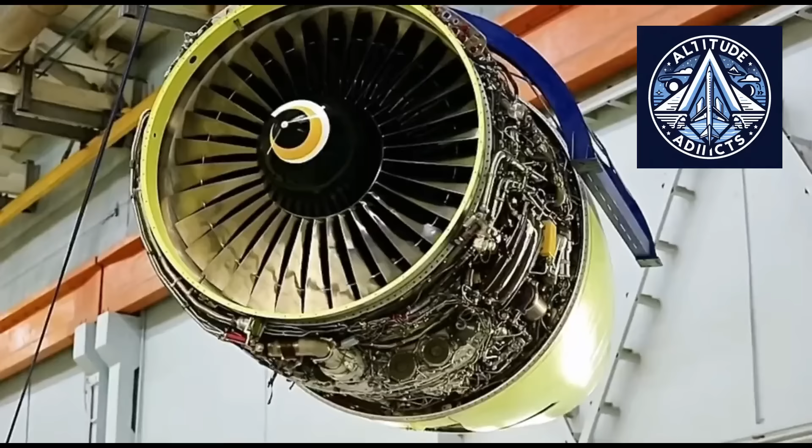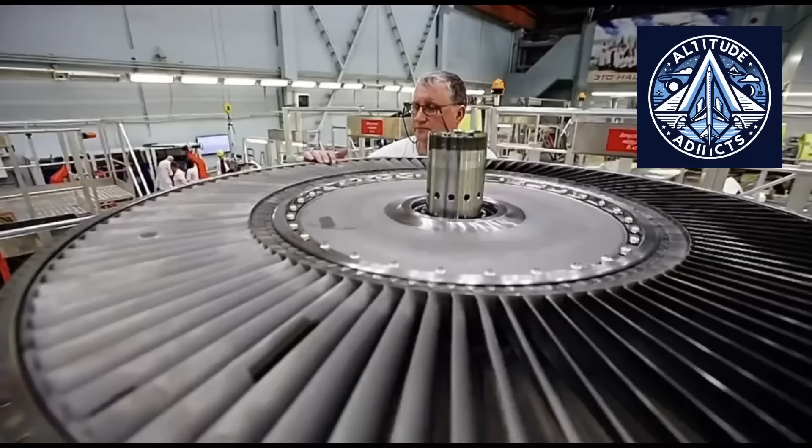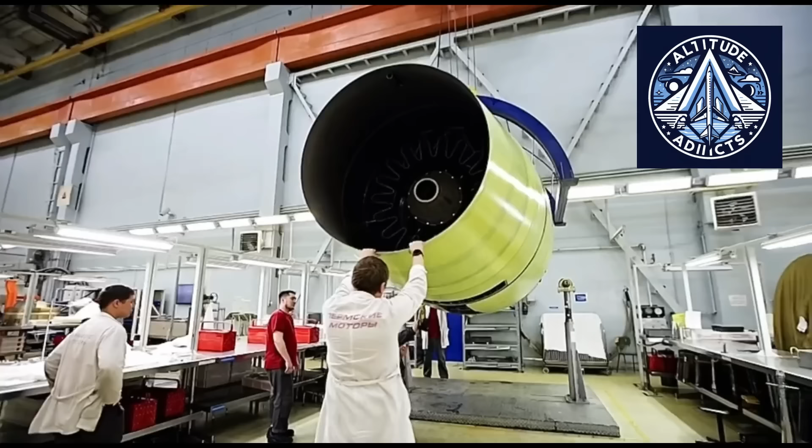Digitalization, automation, and data-centric decision-making are driving a significant transformation in the global aviation and energy sectors. In the gas turbine engine sector of Russia, this transition is particularly apparent, as sophisticated digital tools are being incorporated into production systems that have historically been resource-intensive and complex.

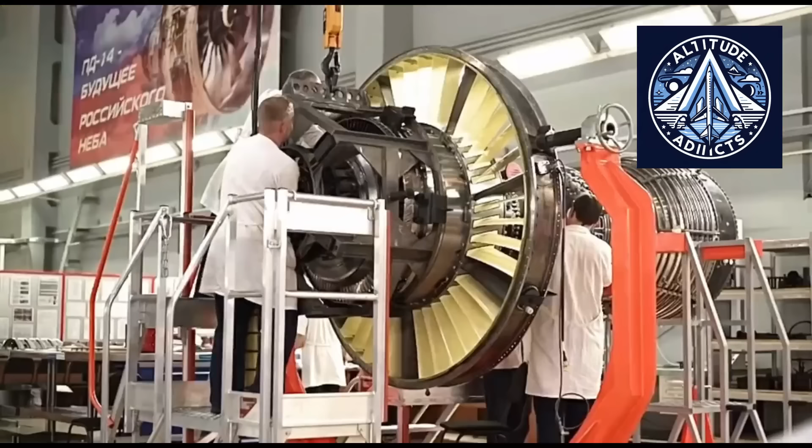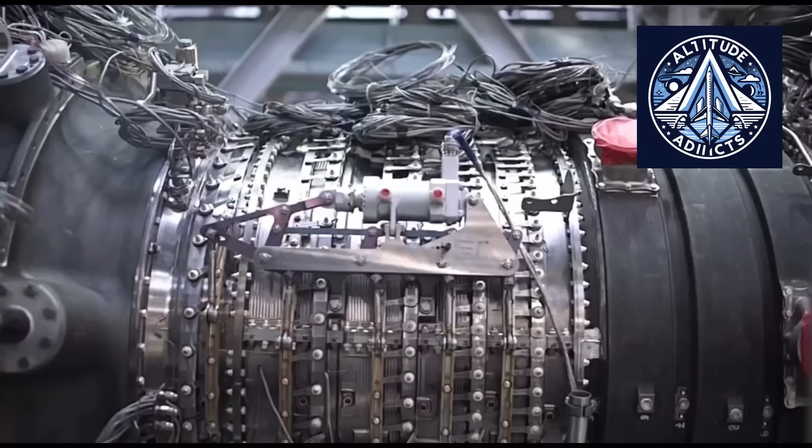One of the most notable examples of this transformation is the Impulse Development 4.0 initiative that was initiated at UEC-Perm Motors. This initiative is indicative of a more extensive transition to Industry 4.0, a manufacturing model in which physical production systems are deeply integrated with digital technologies, including automation, real-time data analytics, and digital twins. The objective is not purely incremental improvement, but rather a fundamental transformation in the manner in which engines are built, verified, and delivered.

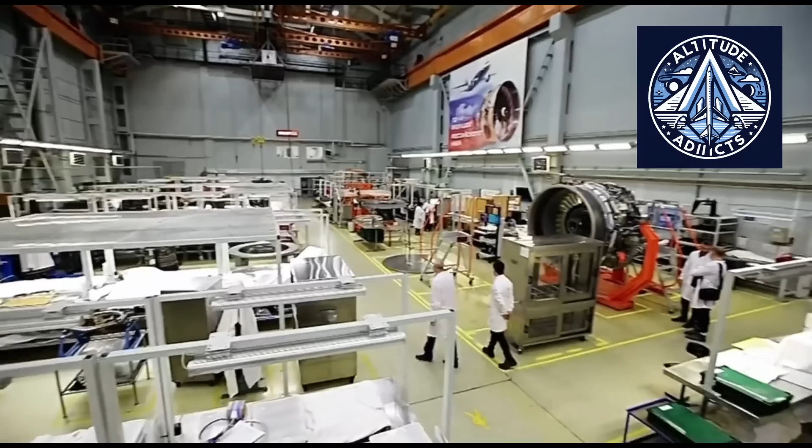Gas turbine engines are among the most technologically advanced products in the world. Their manufacture necessitates rigorous quality control, intricate assembly processes, sophisticated metallurgy, and extreme precision. The development of modern engines, such as the PD-14, is essential for improving the capabilities of the Russian aerospace sector and decreasing its dependence on foreign technology.

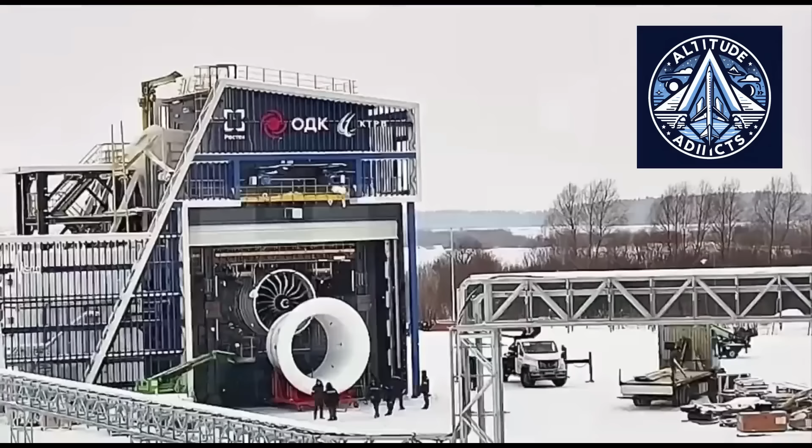Innovations in aerodynamics, materials, and fuel efficiency are integrated into the PD-14, which is intended for next-generation aircraft. Nevertheless, the production of such engines at a large scale necessitates a level of coordination and efficacy that conventional manufacturing methods frequently fail to achieve. This obstacle has rendered digital transformation not only desirable, but also indispensable.

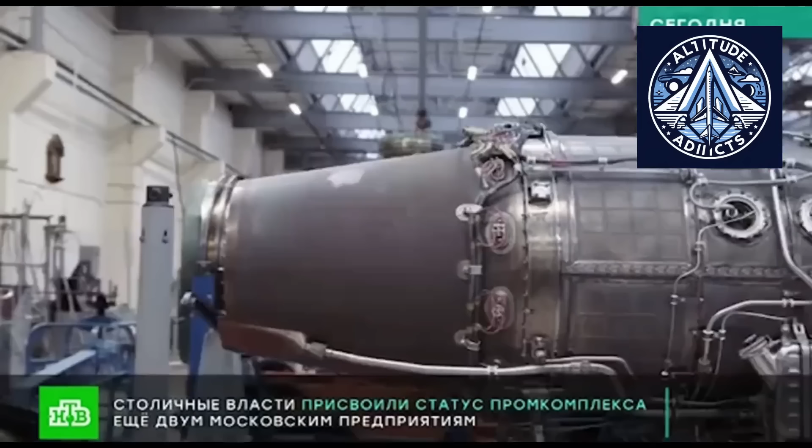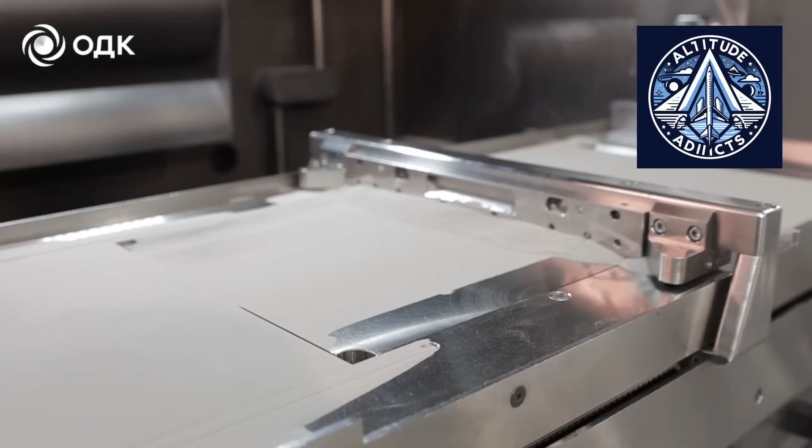The Impulse Development 4.0 initiative is designed to fundamentally reevaluate the organization and management of production. The system employs automated planning tools to generate and manage weekly production assignments, rather than relying on manual coordination and fragmented planning processes. The transition to planning based on norm hours is a critical innovation.

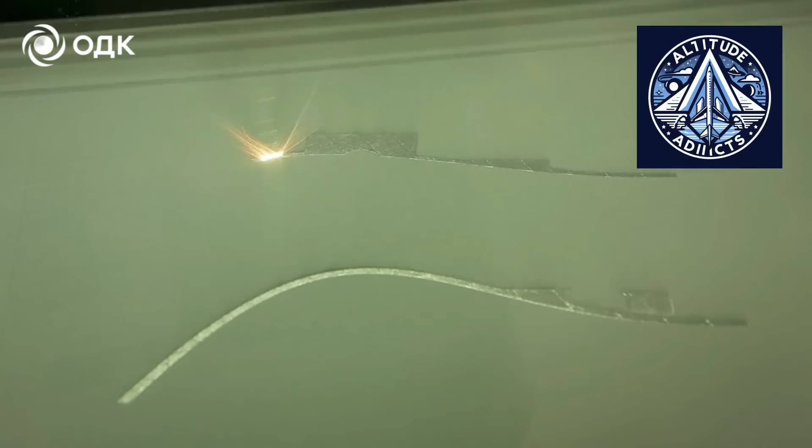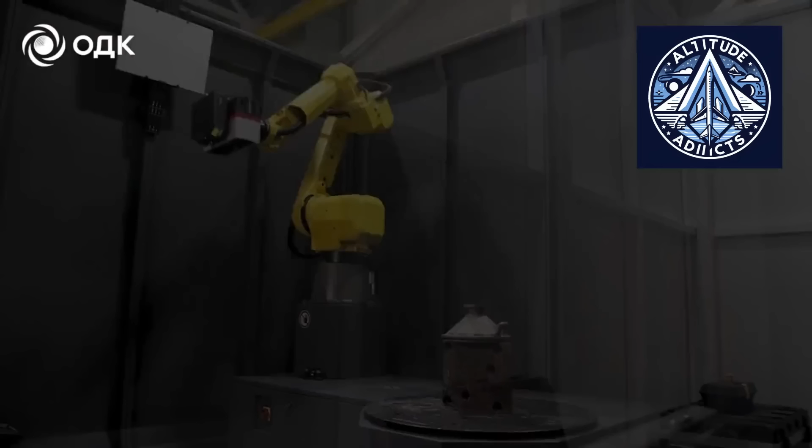With this approach, production managers can allocate resources more efficiently and quantify duties with greater precision. Tasks are no longer allocated based on rough estimates. Rather, they are assigned based on standardized and measurable time metrics. Real-time monitoring of task execution is also incorporated into the system. This implies that any deviations from the plan are immediately visible, which facilitates the implementation of prompt corrective measures. The outcome is a production process that is more efficient, resilient, and predictable.

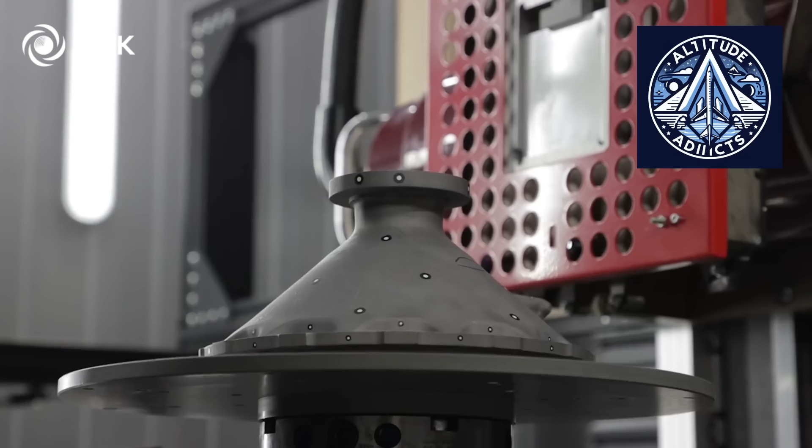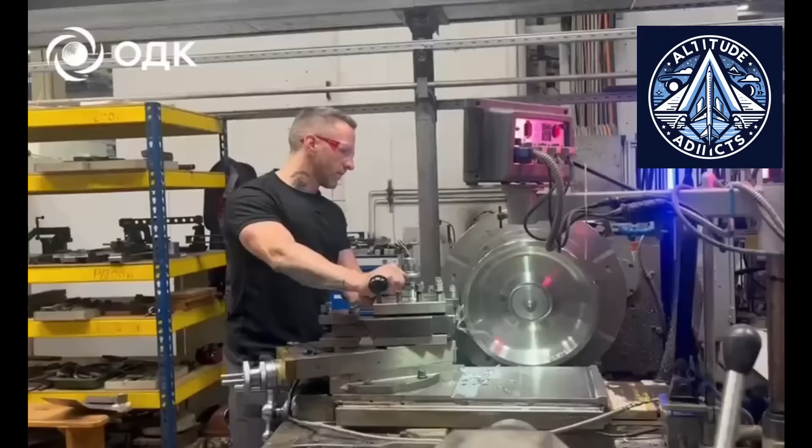The delay that occurs between operations is one of the main inefficiencies in traditional manufacturing. These delays can have a ripple effect throughout the entire system, as components often remain inactive while awaiting the subsequent stage of production. This issue is resolved by the new digital framework, which monitors the movement of each component throughout the production chain. In the event of a delay, the system recognizes the obstacle and modifies the workflow accordingly.

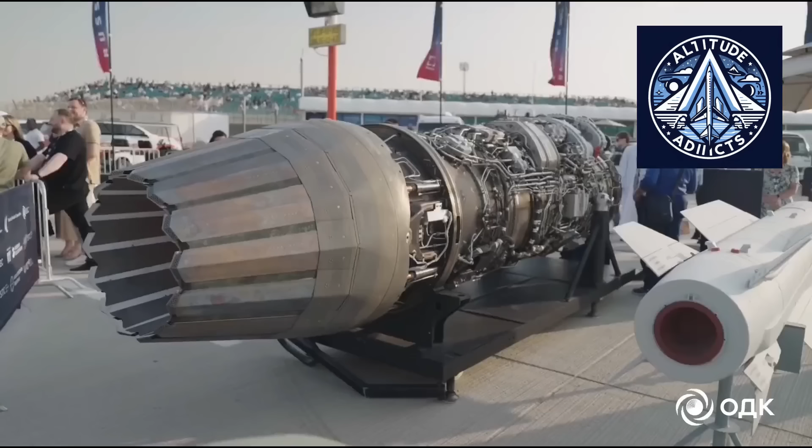That sentence sounds a bit abrupt, but that's kind of how bottlenecks feel in real life. As a result of that adjustment, manufacturers can considerably decrease production cycles without sacrificing quality by reducing inactive time. This is especially crucial in the production of engines, as even minor delays can have substantial repercussions.

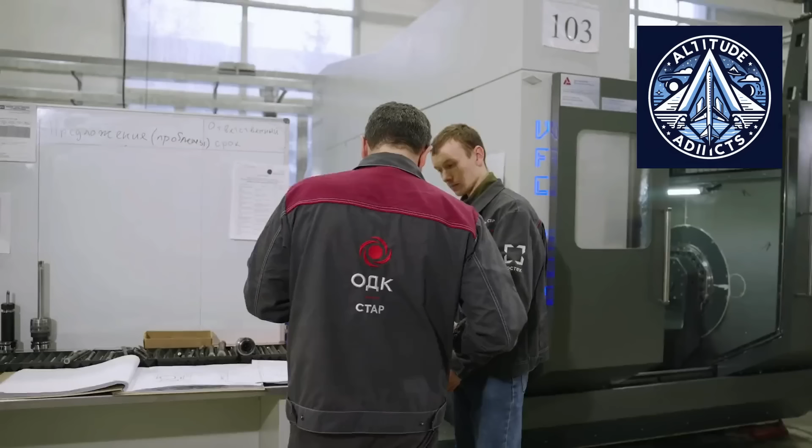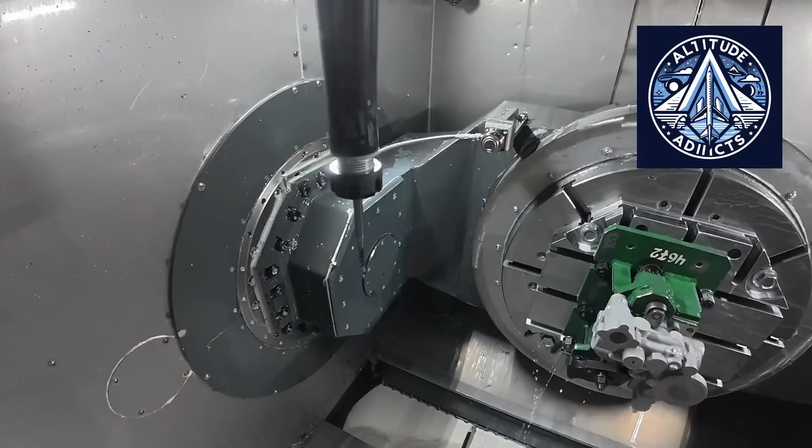At the core of this transformation is the concept of digital twins. A digital doppelganger is a real-time virtual representation of a physical system that replicates its behavior. In the context of gas turbine engine manufacturing, digital twins allow engineers to optimize workflows, evaluate various scenarios, and simulate production processes. Even if the term is not always explicitly used, the systems implemented under Impulse Development 4.0 function as digital duplicates of the production environment. They build a comprehensive digital model of the factory by integrating data from machines, laborers, and logistics systems.

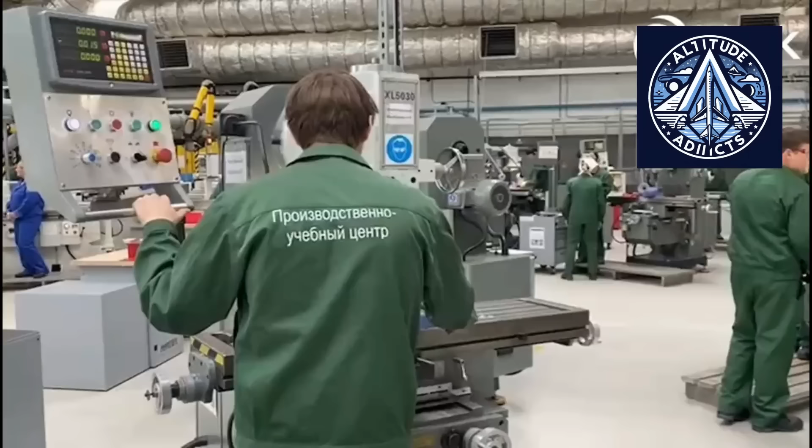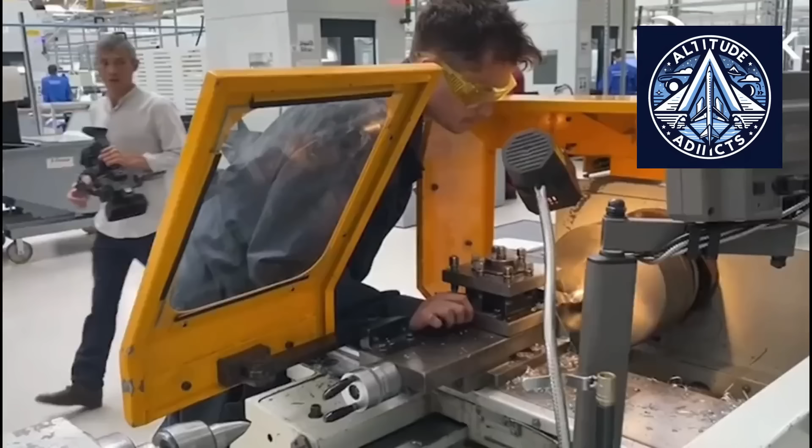This model enables continuous optimization and monitoring. Before problems arise in the physical system, engineers can identify inefficiencies, foretell potential issues, and implement improvements. The outcome is a production process that is more responsive and agile.

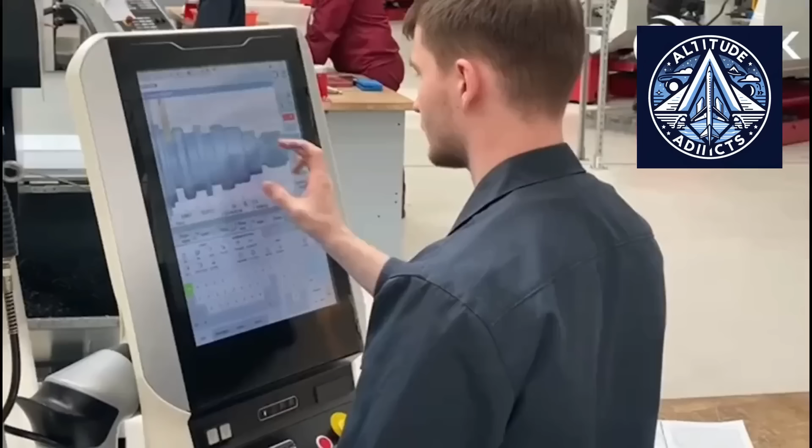As often discussed by altitude addicts, digital twins are not just theoretical concepts anymore, and here they are, clearly being applied in a real industrial environment.

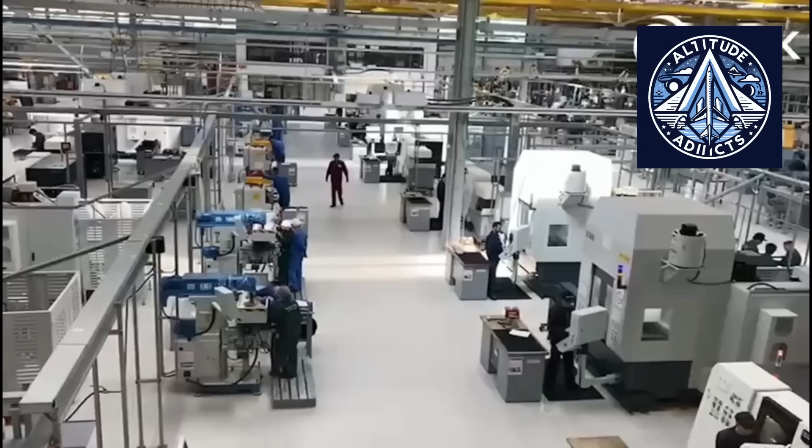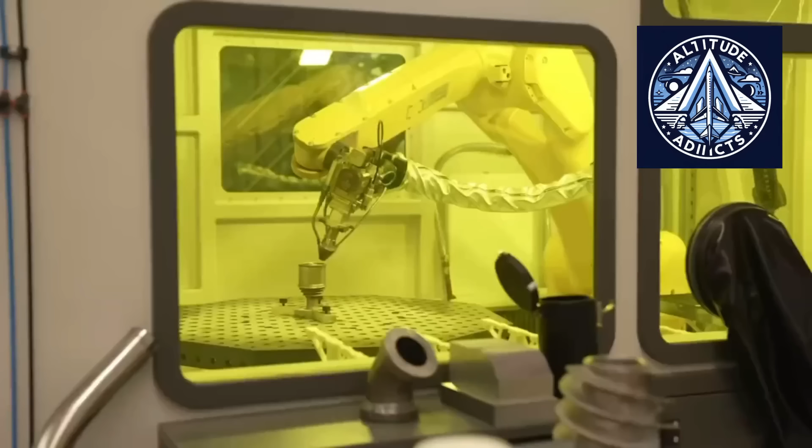Another critical component of the initiative is the implementation of improved accountability and transparency. Delays and errors are often identified only after they have already affected production schedules in conventional manufacturing systems. The new system guarantees that each stage of the procedure is visible in real time.

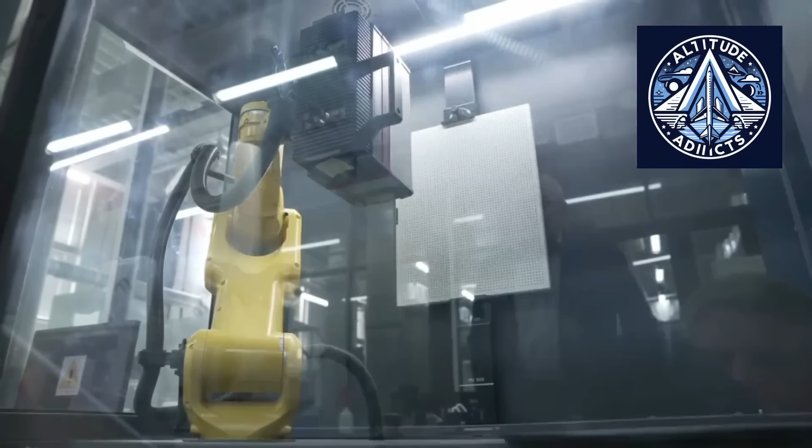Managers can monitor progress, identify discrepancies, and assign responsibility for any issues that may arise. This degree of transparency not only enhances efficiency, but also fosters a culture of accountability.

Because of that, the system ensures that issues are resolved promptly and efficiently by providing performance data that is both actionable and accessible. This results in a higher level of quality and more consistent production outcomes.

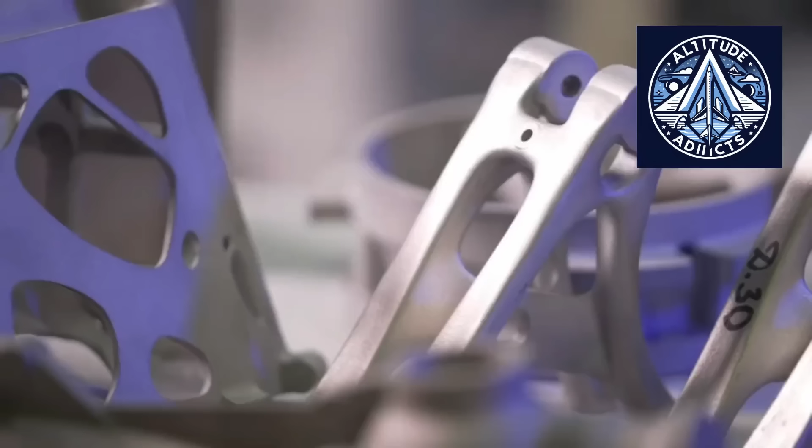Expanding beyond a single facility, the transformation is not limited to a specific location. It includes multiple entities within United Engine Corporation, such as UEC Kuznetsov, UEC Saturn, and UEC Salyut. This integration is essential due to the intricate network of suppliers and manufacturers involved in the production of gas turbine engines.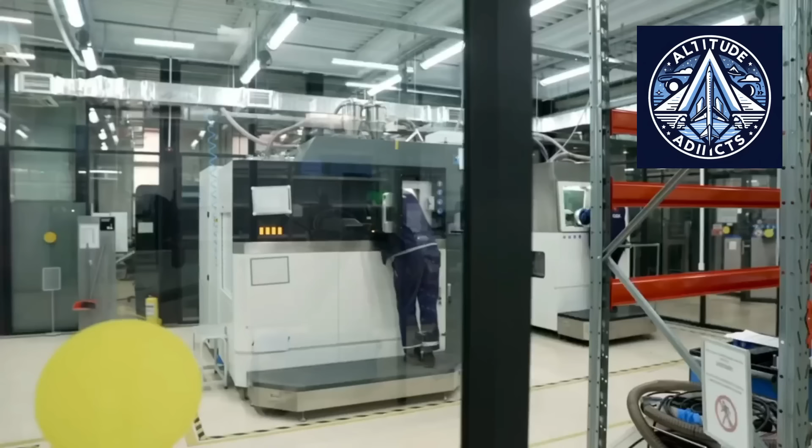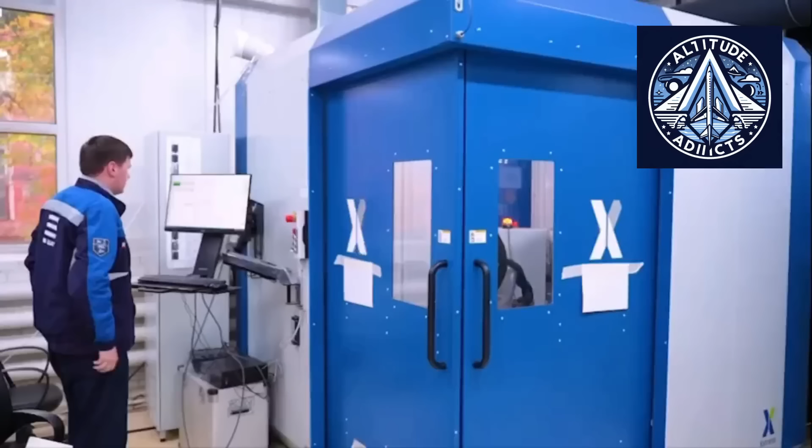Each component must be delivered at the appropriate time and adhere to rigorous specifications in order to be assembled. So naturally, the system enhances overall efficiency, improves coordination, and reduces inconsistencies by synchronizing planning and data across multiple companies. It effectively establishes a unified digital production environment that encompasses the entire supply chain.

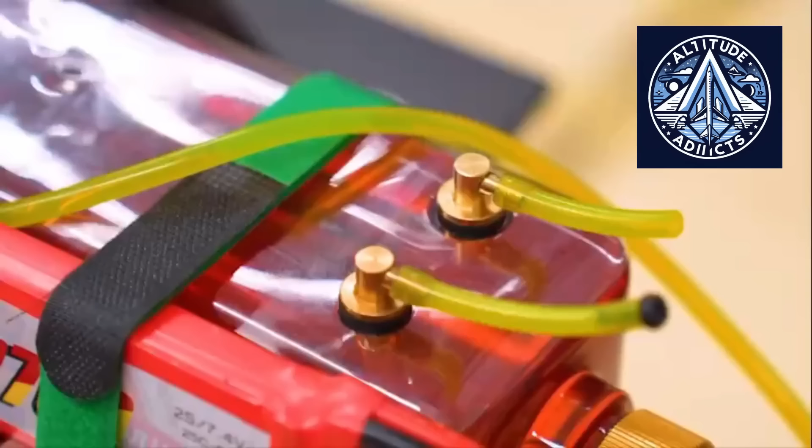Now, shifting into testing, one of the most critical phases in engine manufacturing is testing. It guarantees that each engine satisfies rigorous performance and safety standards prior to its delivery.

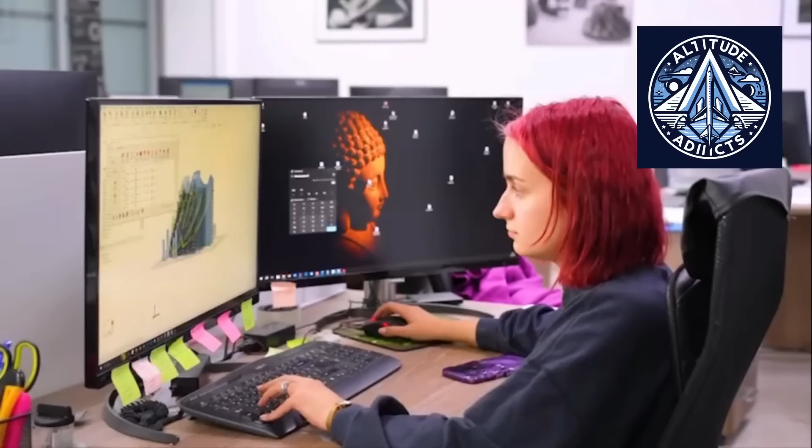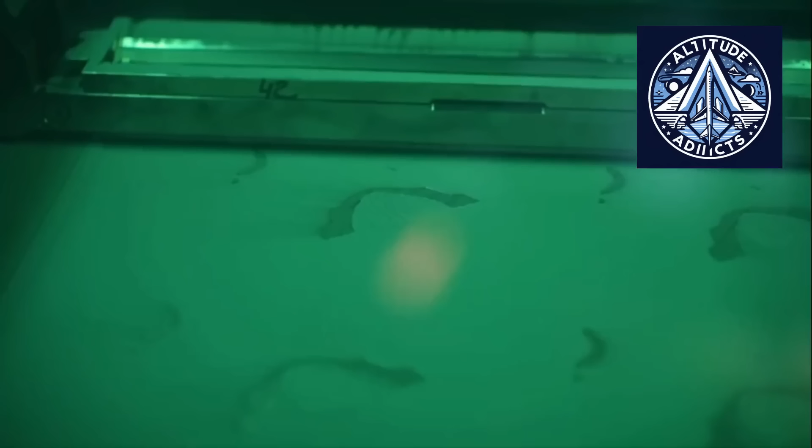A centralized database of deviations identified during testing, as well as methods for resolving them, is introduced by the new approach. This database is integrated with both the design and production teams, resulting in a feedback cycle that expedites problem solving. Industrial engines, including the GTU-16P, GTU-25P, and PS90GP25A, are included in this optimization process.

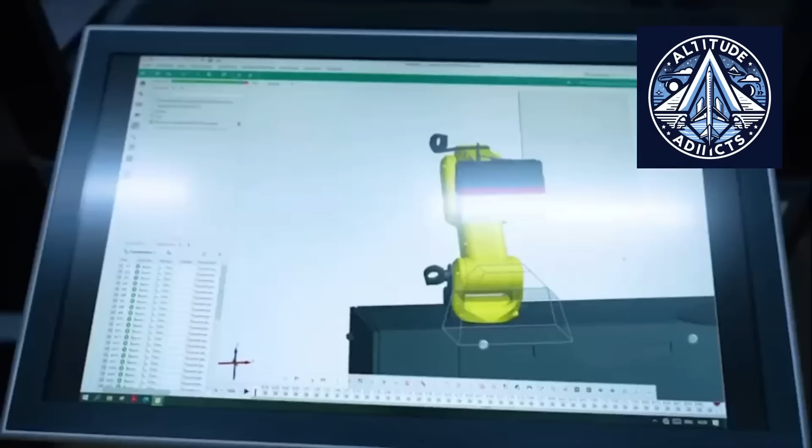Manufacturers can improve reliability and minimize defects by conducting a systematic examination of test results and implementing corrective actions. As highlighted occasionally on Altitude Addicts, these feedback loops are where real efficiency gains quietly happen, even if they don't always get the spotlight.

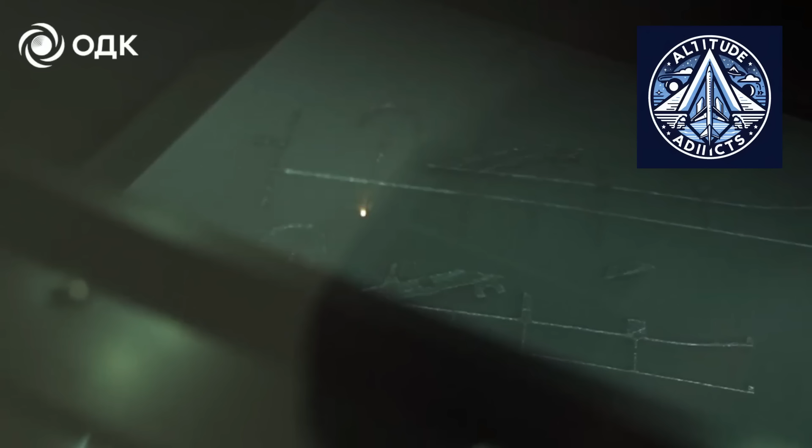Moving forward, the transition from reactive to predictive manufacturing is one of the most sizable advantages of digitalization. Manufacturers can anticipate and prevent issues rather than reacting to them after they have occurred. The system analyzes real-time data to identify potential issues, including equipment saturation, resource shortages, and scheduling conflicts.

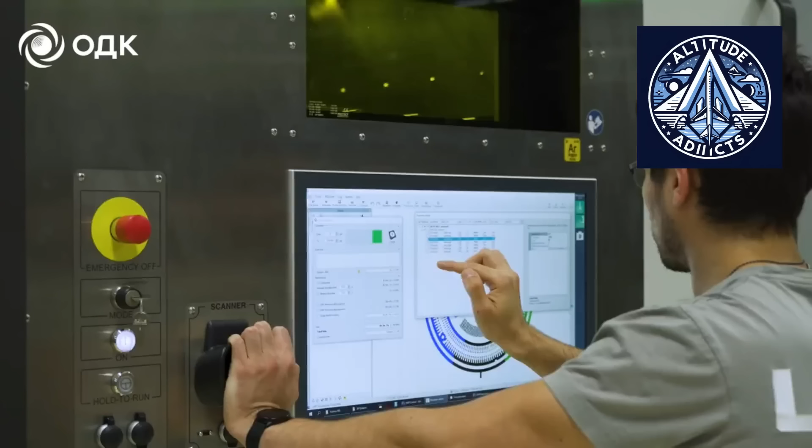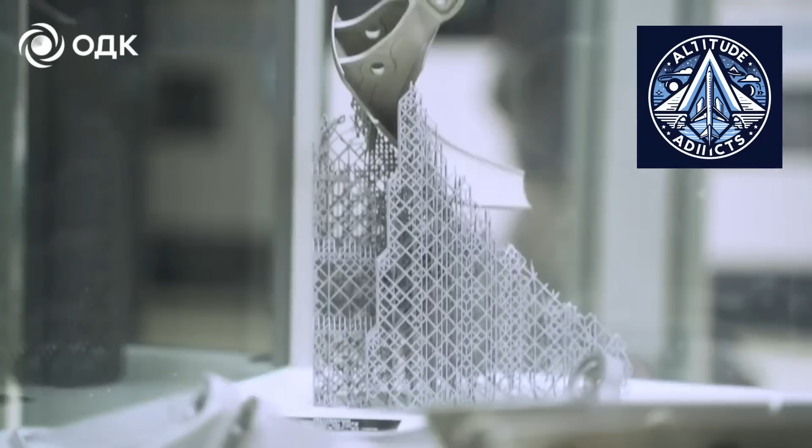This ensures that operations are uninterrupted by adjusting production plans as necessary. In practical terms, this predictive capability not only boosts efficiency, but also mitigates operational risks and reduces equipment wear and tear. It represents a major change in the management of manufacturing systems.

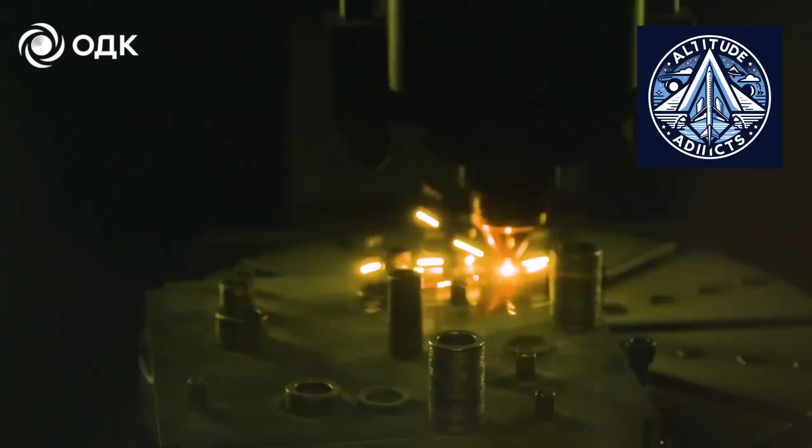Looking at the bigger picture, broader implications for the Russian industrial sector are associated with the implementation of digital technologies in engine manufacturing. It illustrates the potential of advanced technologies to enhance competitiveness and modernize legacy systems.

Digitalization enables domestic manufacturers to compete more effectively in global markets by reducing production costs, enhancing quality, and increasing efficiency. It also promotes the advancement of new technologies and capabilities that can be implemented in other sectors.

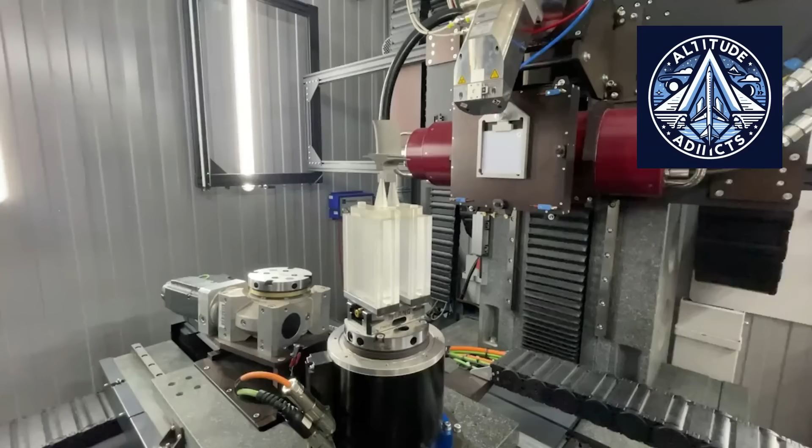In this regard, initiatives such as Impulse Development 4.0 are not only concerned with improving the functioning of individual factories, rather, they are designed to establish a more sophisticated and resilient industrial ecosystem.

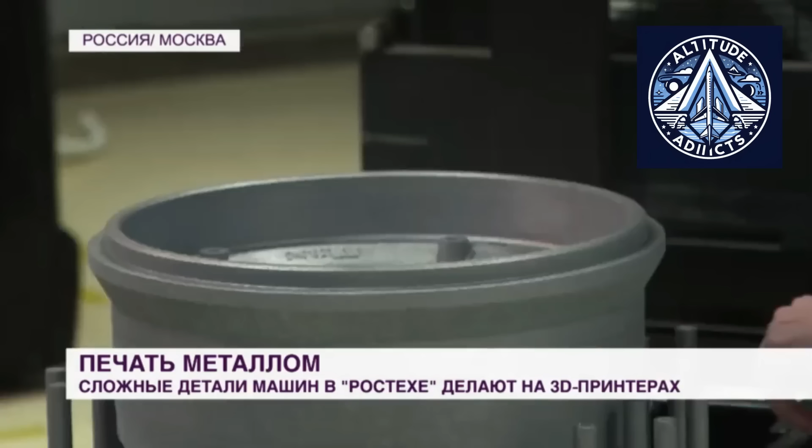Of course, the transition to digital manufacturing is not without challenges. It necessitates major investments in infrastructure, workforce training, and technology. Integration of new systems with existing processes is also a complex and time-consuming process.

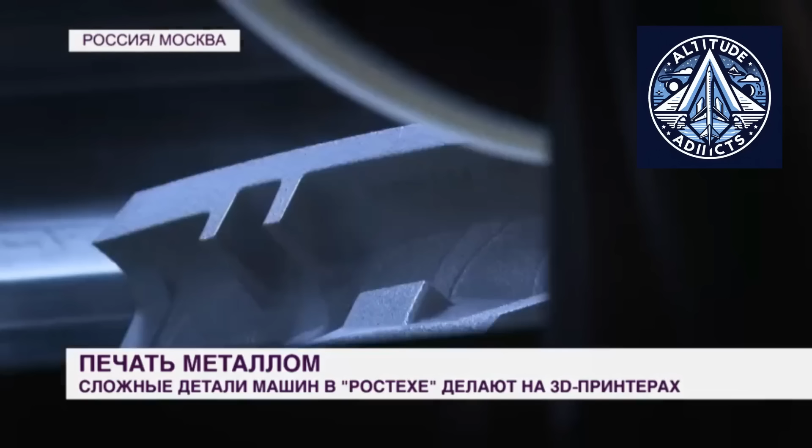Still, the potential advantages are substantial. It is expected that these systems will continue to improve their efficiency, flexibility, and innovation as they continue to develop.

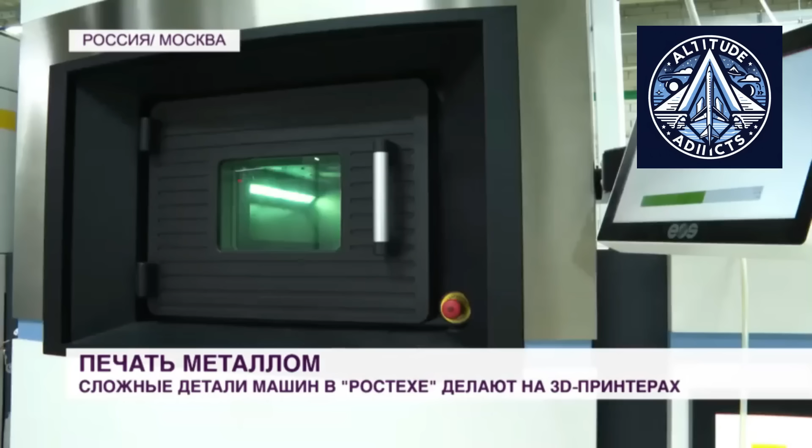Looking ahead, the integration of artificial intelligence, more sophisticated digital twins, and wholly autonomous production systems may be among the future developments. These technologies have the potential to expand the capabilities of engine manufacturers and create new opportunities for industrial growth.

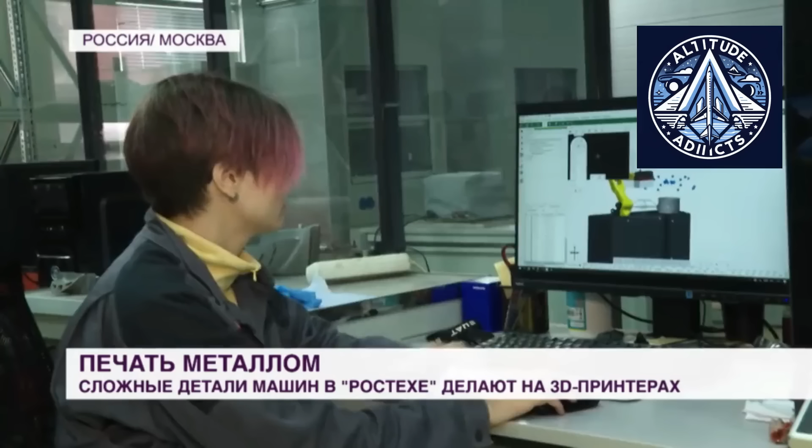As Altitude Addicts continues to observe, these shifts are not isolated. They are part of a broader industrial evolution happening in real time.

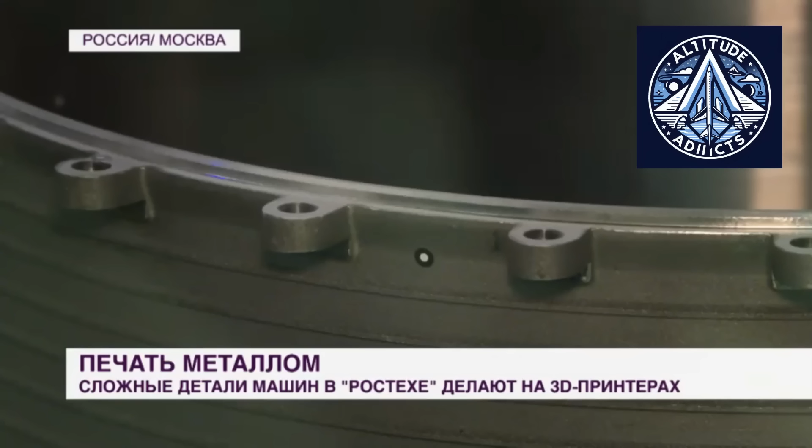Finally, bringing it all together, the implementation of digital twins and automation in the production of gas turbine engines in Russia represents a substantial advancement in industrial development.

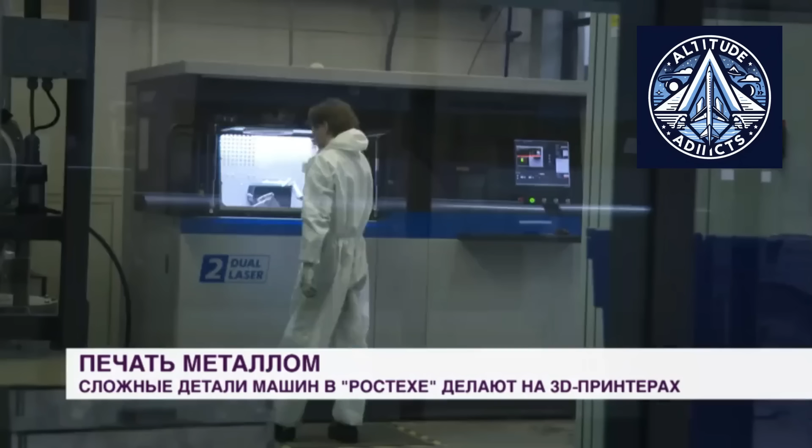The Impulse Development 4.0 initiative illustrates how modern technologies can be applied to address persistent difficulties and establish production systems that are more transparent, efficient, and dependable.

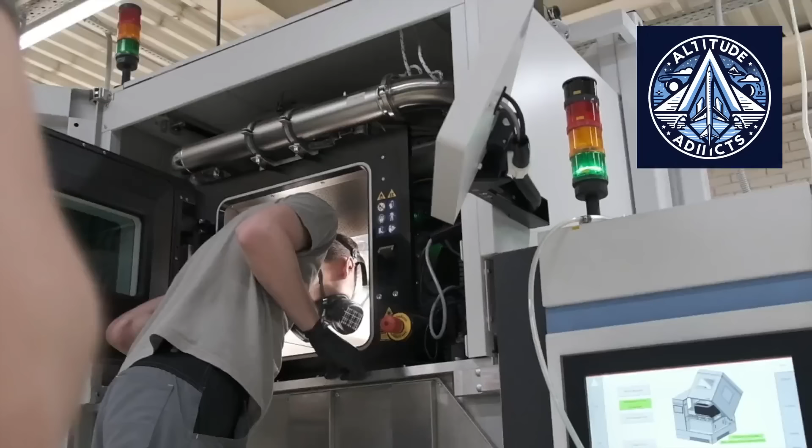Russian engine manufacturers are not just enhancing their current operations, but also establishing the foundation for future innovation by adopting digitalization. This transition to intelligent manufacturing will be instrumental in determining long-term success in a global environment that is becoming increasingly competitive.

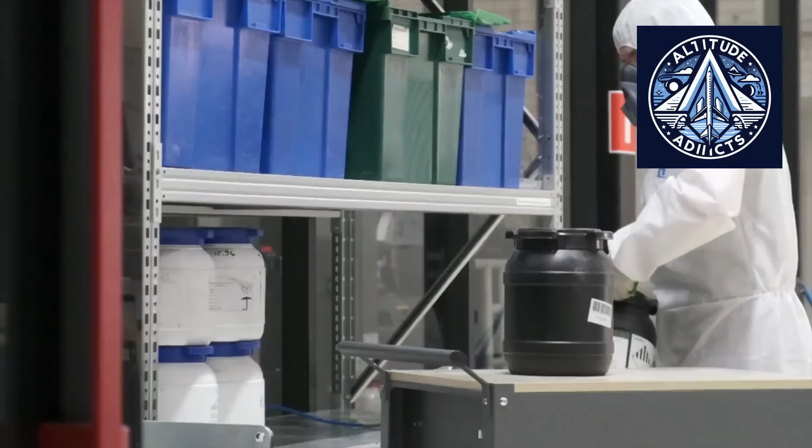And in the end, the current transformation is not just a technological enhancement, it is the cornerstone of a new industrial era.